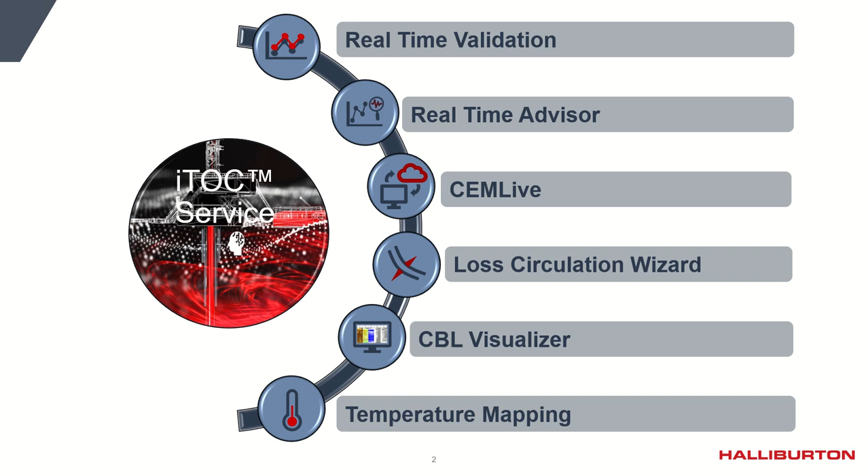Now let's dive into the first solution. The real-time validation is a solution that gives us the ability to assess execution deviations from the design or from the planning, all of this while execution is taking place. This will also enable us to monitor fluid positions while the job is taking place, and naturally, the end of job fluid position. You will have access to the main 4 variables.

In real-time pressure, real-time slurry rate, real-time density, and real-time slurry volume, in addition to having access to the calculated pumping pressure. The calculated pumping pressure is calculated by the model, geometry, fluid properties, and all the different placement parameters and pump schedules that are defined in the model by taking into consideration the actual real-time rate and real-time density.

When there's an optimum match between the calculated pressure and the real-time pressure, especially during the displacement phase, we can conclude that the hydraulic response of the model matches the hydraulic response of the wellbore. And as a result, the actual calculated ECD is representative of the downhole ECD that the wellbore is exposed to. We can also have a comparison between the design ECD and the calculated ECD.

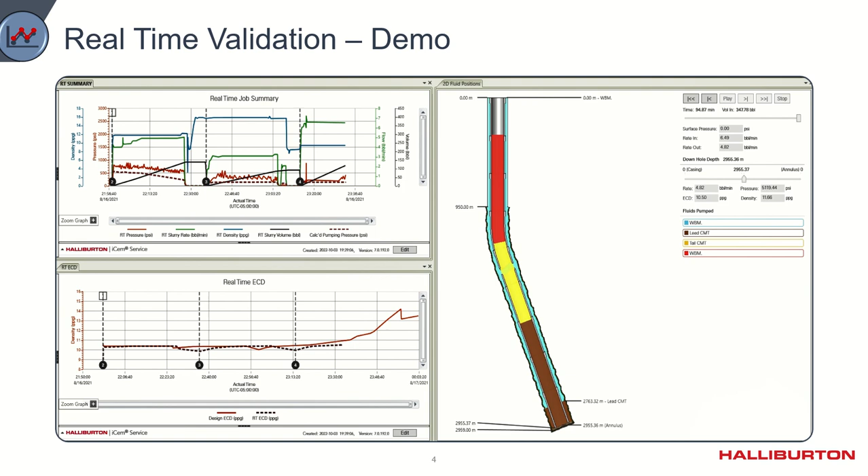We'll fast forward the displacement phase, which is one of the most critical phases in order to prevent any potential losses or any potential changes, or keeping the ECD within the pore pressure and the fracture gradient. What you can see here is that there's a good alignment towards the end of the displacement phase, or the last quarter of the displacement phase, in between the calculated and the real-time pressure.

This good match between the maximum pressure and the final circulating pressure, or the bump pressure, indicates that the hydraulic response of the model matches the hydraulic response of the well. And as a result, the ECD that is obtained for this case is in fact the downhole ECD that the well was subjected to.

This is information that you can use in real time in order to determine whether a zone is going to be fractured or not. Also, whether that ECD is maintained within the pore pressure and fracture gradient limits. And also importantly, is to determine which actual ECD the well was exposed to, so that you can use that information for adjacent wells or future wells.

But the important part of this tool, or this real-time validation, is, in addition, having access to that 2D fluid position. This is important in cases where there are some issues that take place in the middle of the job, but also important to give you an accurate representation of where the fluid positions are at the end of the job, meaning what are the tops of cement, especially when there's an optimal match in between the calculated pressure and the real-time pressure.

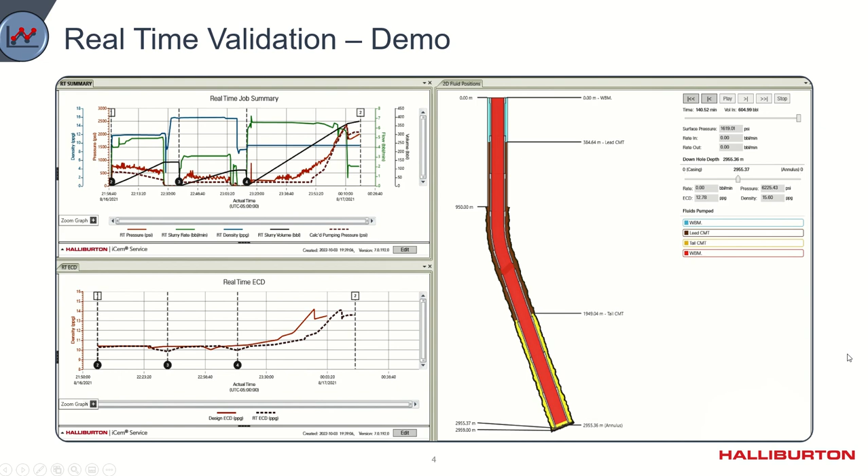So it's important to know that the real-time validation tool will give you the ability to monitor placement while the job is being executed. You're able to assess the 4 key variables: pressure, rate, density, and volume. In addition to that, if there's a good hydraulic response of the model compared to that of the well, then you will be able to also monitor ECDs in real time. And most importantly, you'll be able to have an idea of 2D fluid position during execution, and 2D fluid positions at the end of the job.

The real-time advisor tool pushes the boundary of real-time validation, the previous solution, mainly by giving you the ability to have a better understanding of whether the job objectives are to be met or not, all of this while you are executing the placement process. What does that mean? While you're executing the job, real-time validation focuses on from the beginning to the present point in time during the placement.

But the real-time advisor will forecast what that top of cement is. From any point while executing the job, it will give you the ability to understand whether that top of cement objective will be met or not by displaying a forecasted top of cement, a forecasted surface pressure, and a forecasted ECD. In addition, this solution will enable the cementing operator or the engineer on location to adjust multiple controls in order to tailor job placement with the end in mind of achieving operational success and ultimately achieving top of cement.

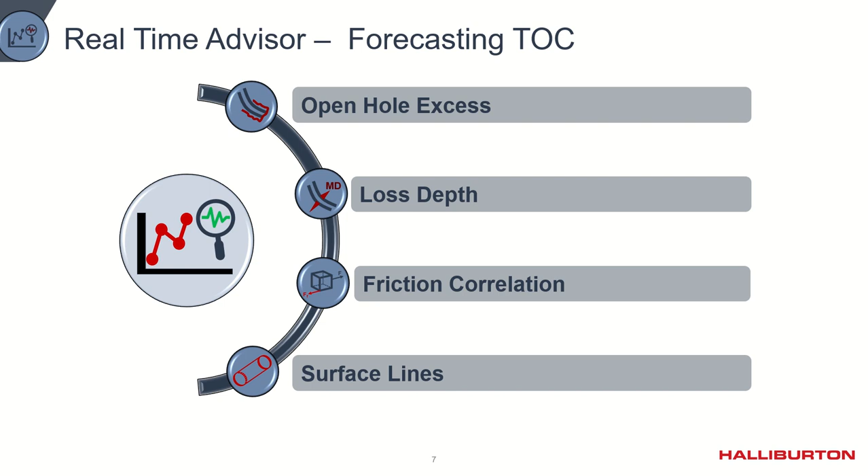As a result, the forecast will be able to give the operator and the engineer valuable information to make well-informed decisions while execution is taking place. You'll be able to adjust these controls in order to maximize the probability of achieving operational success and ultimately meeting those top of cement requirements.

Now let's take a look at a demo for this tool. So what we have here is the 4 controls that we mentioned earlier, which is open hole excess, loss depth, friction correlations, and surface lines. This is a preliminary proof of concept that we have for this tool. This is not the final user interface that you'll be exposed to, but it's representative of the capabilities of the tool. In the top graph, you have pressure versus volume, which could be pressure versus time.

These markers highlighted in red represent the plan or the design markers. What is the plan volume? At which point in time are we expected to pump each specific stage? And these dotted black lines represent the real-time markers. They initially match the design markers because we have not executed any stages yet.

Then in the bottom graph, you have the calculated or the forecasted ECD. Basically, what is the expected ECD that we're going to achieve should everything go as per plan. Then on the right side, we have the 2D fluid position. We have measured depth in the y-axis and diameter in the x-axis, with these black lines representing the actual casing size and the blue color representing mud, which is present in the wellbore prior to executing the cement job.

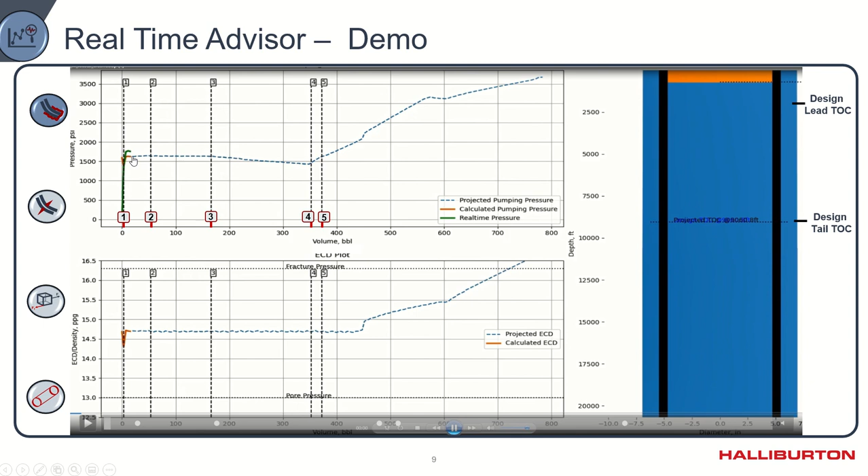Now let's walk back and let's make sure that we go through the demo. So the initial stage what we have is spacer. So we're pumping the spacer into the well. That's stage one. There's no major changes on plan compared to actual execution. So what you can see here is that you have a calculated pumping pressure, which is the orange yellowish line. You have a real-time pressure, which is the green line. There's no major discrepancies between the two. We have a good match.

We have used our control one, which is the open hole excess during the pre-job circulation phase, in order to generate a good match between the calculated and the real-time pressure. That means that the geometry is providing an optimum hydraulic response for the model, which is representative of the well. There's no major changes on rates and volumes. As a result, there's no changes on the actual stage tickers or markers in real time versus the stage tickers or markers for the design phase.

Then we finish pumping the spacer and we commence pumping the lead cement, which is stage 2. Again, there's no major changes, no major discrepancies. Something else to note here is that the projected top of cement is overlapping the design top of cement. The design top of cement is in the back in the blue color, also represented here by the marker.

There's no major discrepancies in regards to rates and volume while pumping the lead cement, and then we proceed to place the tail cement. Again, no major discrepancy towards the middle of the job. However, towards the end of the job, something we can point out here is that you see how the red marker for stage 4 is not in alignment with the dotted black line for stage 4.

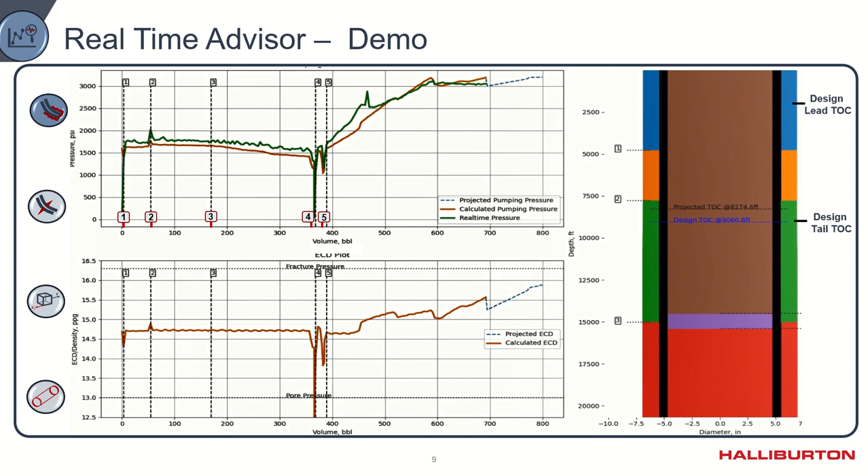Okay, and at the end of the job, we're able to actually establish that the final placement of the fluid is as indicated in the 2D fluid position graph. The projected top of cement is at a shallower depth compared to that of the design top of cement. The objectives were met. The ECD was kept between the pore pressure and the fracture gradient.

The forecasts enabled the operator or the engineer on location to make well-informed decisions. By reducing rates, they were able to minimize the impact of ECDs on potential losses.

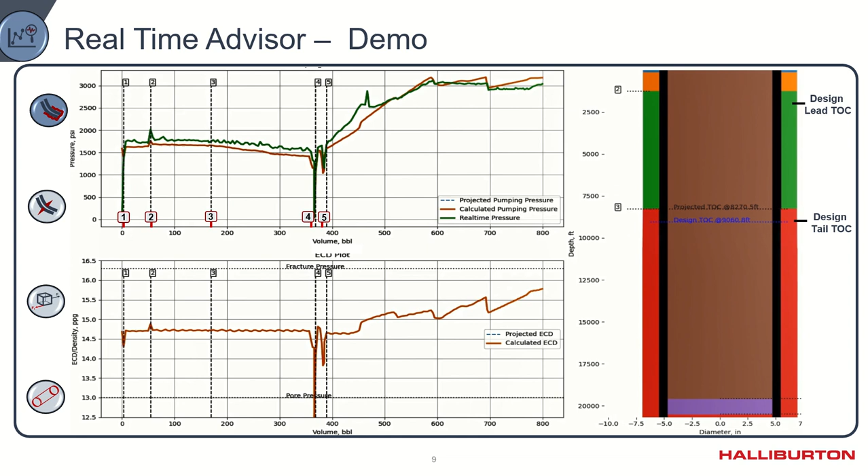So in regards to real-time advisor, this continues or pushes the limits and the boundaries of the real-time validation solution. While the real-time validation focuses on anywhere from the beginning of the job to that present time during execution, and how that hydraulic response is in alignment with the well response,

the real-time advisor looks beyond that point. It forecasts what is the expected response or output of the job, taking into account all the changes and variations that had taken place up to that point. And it will give the operator or the engineer on location the information in order to make decisions in real time in pro of achieving operational success, of achieving that top of cement goal.

That takes us to our third solution, CEMLive, which is an easy access cloud-based interface that enables remote monitoring by connecting remote engineers and supervisors to the rig site. And also importantly, it will allow you as our clients to have access to real-time jobs that are being executed, in addition to having access to some historical job results.

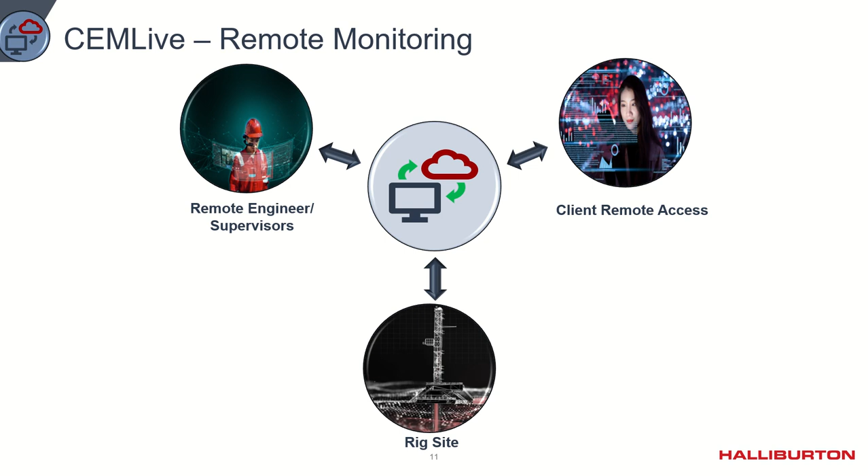In order to locate those active jobs, one of the views that we'll have on this tool is the map view. So when you'll have access to your area, to your project, to your rigs, and for those jobs that have been executed for your rigs and your area, you'll be able to monitor which ones have been executed and which ones are ongoing.

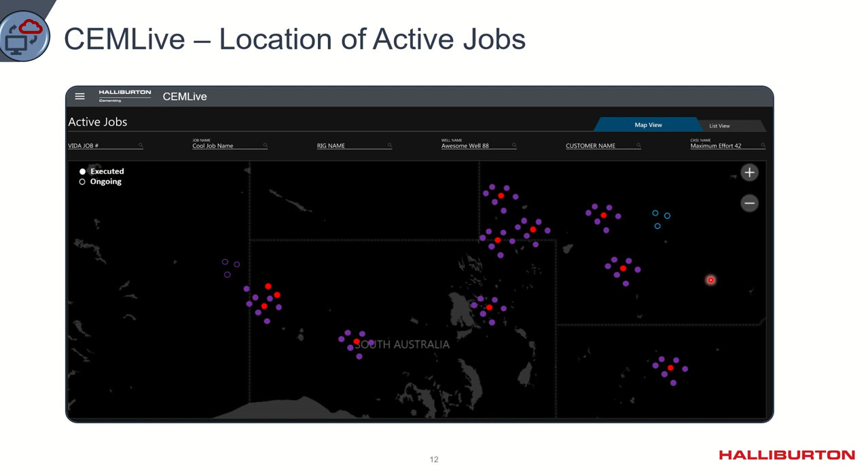By simply clicking on any of these jobs, each circle represents a specific latitude and longitudinal location of that specific job, of that specific well. Then you will be able to access in real time those that are ongoing, while they're taking place. In addition to that, you'll be able to actually access historical job results. You'll be able to download the real-time data for those that took place in the past, and you'll be able to monitor and observe any jobs that are taking place in real time.

You'll have a list view, which is the same information as the map view, just in a tabulated format, or have a specific VIDA ID, which is specific to each job. You have a job name, rig name, well name, which one is the operator, and what is the case that the job is being executed based on. This case name comes from iCem.

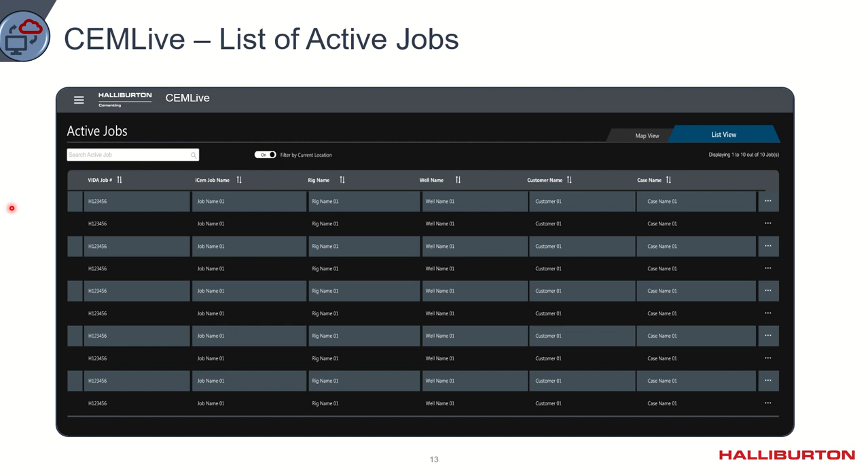In regards to the data structure that you'll be able to access, you have all the different data that the operator and the engineer will have access to in location, meaning pressure, fluid densities, rates, volumes. For offshore case, you'll have access to liquid additive rates, etc. In addition to that, you'll have access to calculated variables such as calculated surface pressure, calculated bottom hole ECDs.

For those fluid stages, you will be able to assess what is the density histogram of each specific fluid stage. That will give you an idea of if that density KPI is being met or not. This is while the job is being executed. You'll have access to an average density, a planned density, a min and max, and a standard deviation. And also importantly, you'll have access to what is the 2D fluid position while execution is taking place, and also what is the 2D fluid position at the end of the job.

The main goal of all these tools, as you can see so far, is giving you the ability to access the data in real time, have access to instantaneous top of cement, which is 2D fluid positions while the job is being executed, knowing where your fluids are at any given point in time, from the beginning of the job until the end of the job. And CEMLive is just the gate, the interface that will give you access to all of that information. You don't have to wait until the end of the job and then a post-job report evaluation is generated. You're going to have access to this information while execution is taking place.

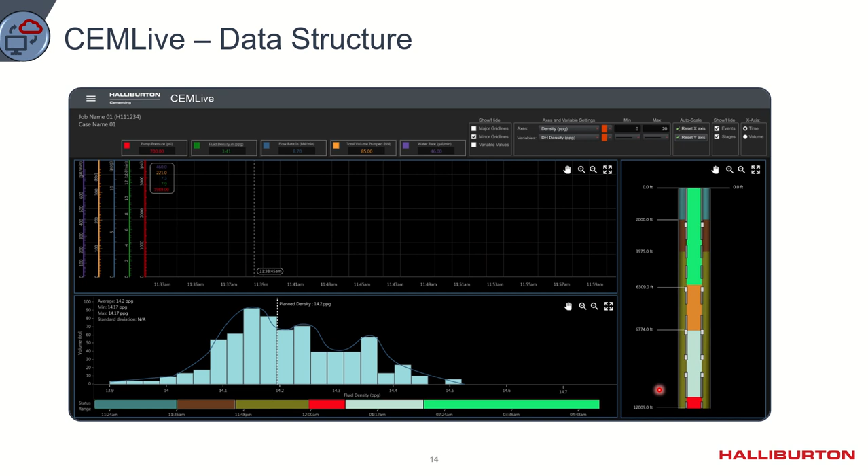Now, just to give you an idea of what the tool initially looks like, this is just a representation of the data transferring part. In this case, we'll transfer pumping pressure, slurry rate, slurry density to the tool. And as you can see, you'll have access to all the different stages and events that the operator defines while executing at the rig site. Same names that the operator defines, so you know what is being done at any given point in time in terms of which fluid is being pumped, etc.

And in addition to that, you'll have the ability to download a CSV file while the job is taking place, or you can wait until completion of the job in order to access it or to download it. Keep in mind, you'll have access to the historical jobs that have been already performed. So even though you were not able to monitor any of these jobs, you will be able to go back to CEMLive, click on that job that you want to see the real-time data from, and you'll be able to download it at any given point in time.

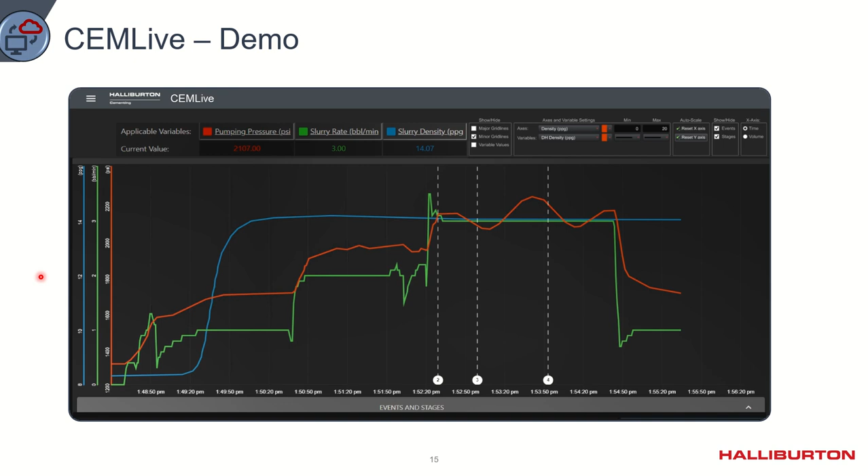So the advantage of CEMLive is giving you easy access to real-time data so that you can have instantaneous job validation, so that you can have, after execution takes place, the ability to print or attain a top of cement validation report, so that you can use that information to meet your internal requirements and in some cases potentially regulatory requirements.

Our next solution is Lost Circulation Wizard. Lost Circulation Wizard optimizes our top of cement prediction by improving our lost circulation model. The Lost Circulation Wizard consists of two stages. Number one is the model calibration.

The model calibration stage consists of employing the geometry, fluid properties, placement parameters, and other factors from the iCem design file, and combining that with our understanding of what is the loss type, whether that is an induced fracture, a natural fracture, or a permeable formation. What is the loss rate that is typically attained in that specific well or in that specific field? What is the expected loss depth, or what is the formation that usually results in losses? What is the area that usually results in losses?

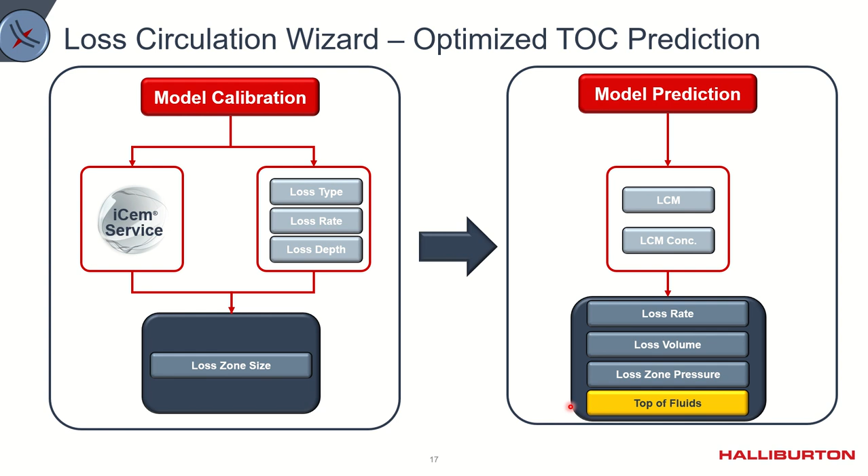Now, how do we assess the accuracy of this model? We have looked at different locations, different basins, different loss types, including all the ones that we can model, which are natural and induced fractures along with permeable formations. Importantly, we assessed a wide range of loss rates, from 30 to 240 barrels per hour. We also evaluated different fluid LCM packages in cases where the LCM was added not just to the spacer but also to the cement, and at different concentrations.

So what we're looking at here is Tuned Defense cement spacers with BridgeMaker II, and more conventional LCMs such as Kol-Seal and Pol-E-Flake at different concentrations. Other cases where we added LCM, in this case BridgeMaker II, to the Tuned Defense cement spacer, but also to the lead and the tail at different concentrations. And other cases where we employed more conventional spacer designs with LCMs, also adding those LCMs to the cement. Ultimately, what we measured in the actual jobs was the percent reduction in losses after the treatment, and then the prediction of the model.

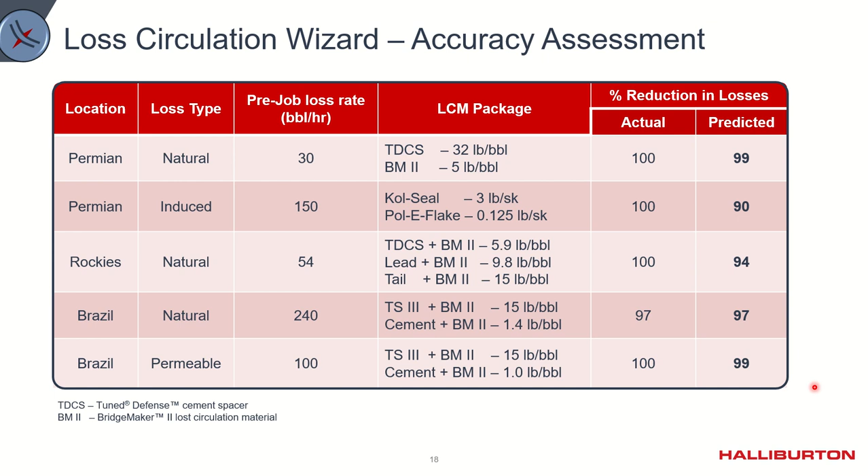What you can observe here is that the prediction of the model based on the actual tests is at least 90% accurate. When we compare this to other models based on literature reviews, typically the other models are numerical, based on some statistical analysis. Their accuracy is in the order of 66-67%, while our model is physics-based and has an accuracy of at least 90%, which is extremely good.

But in addition to assessing the accuracy based on actual well results, case studies and data, we also challenged the model: if our loss prediction is accurate, the hydraulic response of the model when exposed to losses should match the hydraulic response of the wells where losses took place. And that's precisely what we check.

So what we're looking at here is surface pressure. You have in the yellow-orange line the real-time pressure, the hydraulic response of the well, versus the calculated pumping pressure, the hydraulic response of the model, by modeling losses and those specific fluid and LCM concentrations and packages, geometries and distribution.

Those tailored fluid solutions, we model those, which is what actually was executed during the jobs. And we assess what is the response of the model. If the model is accurate from the prediction, it should be also accurate by matching these hydraulic responses. And that's what we were able to achieve here. So you can see there's no major discrepancies between the real-time pressure and the calculated pressure.

In addition to that, we're able to assess what is the rate in, the rate out while executing these jobs. And by doing so, we're able to determine at which point during the placement process we actually cure the losses or mitigate the losses, depending on the case.

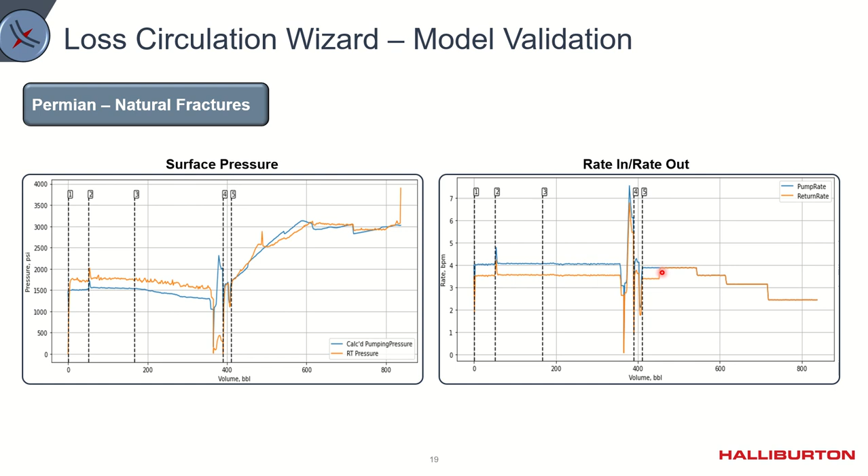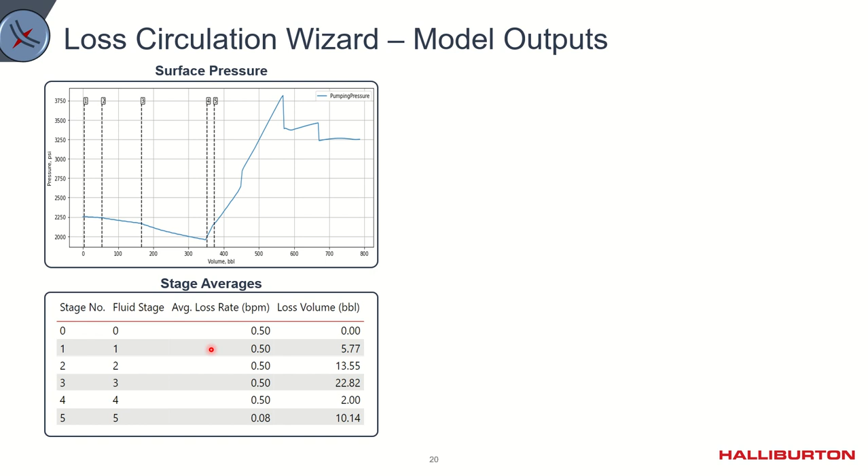In terms of the outputs that we're able to achieve, naturally we have surface pressure. We're also able to determine what is the loss rate and the loss volume per stage, where each stage represents a fluid. You have stage 0, which is mud, then spacer, lead, tail, then water behind, and displacement fluid behind water. You're able to assess what is the average loss rate over each stage and how much volume has been lost or will be lost for each fluid.

In addition to that, we have these black markers which represent stages, represent fluids that are pumped into the well, and we have these red markers which represent events. These events in the context of Loss Circulation Wizard are representative of when each fluid reaches the loss zone. Event 1 means that the spacer reached the loss zone, etc.

By having the event average table, we're able to assess that when the spacer, which is fluid 1 or stage 1, reaches the loss zone, the loss rate significantly reduces and the loss volume also significantly reduces. That means that the spacer, since in this case it is the first fluid with an LCM package in it, is able to mitigate the losses significantly.

That is attained by monitoring the loss rate. You can see the loss rate significantly reduced when fluid 1 reaches the loss zone. And in addition to that, we're able to monitor how much loss rate we have and how much loss volumes we have from that point on.

All this information allows us to assess how effective or how efficient these fluids and LCM packages are in the goal of mitigating losses. In addition to that, we'll get valuable information as to how much volume of each fluid we are potentially losing or potentially saving as a result of the fluid LCM tailored solution.

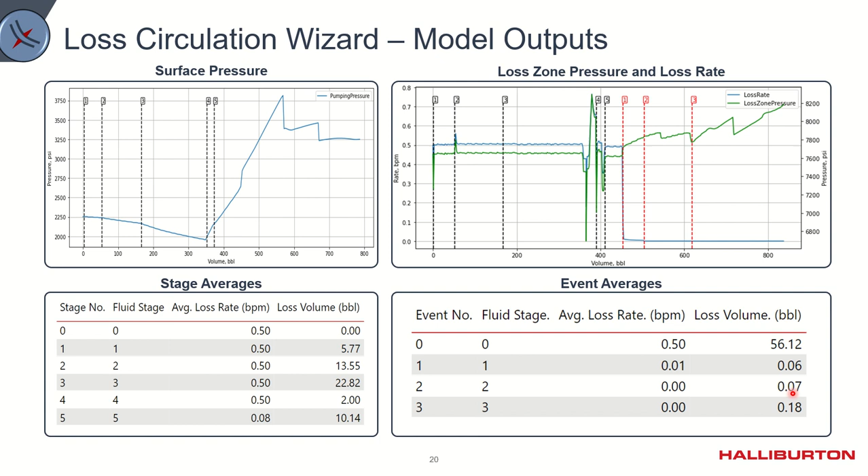The initial tool will be a standalone tool, which is Loss Circulation Wizard 1.0, where we're going to have the stage average results we already discussed, where each stage represents an individual fluid that is placed into the wellbore. We have the event average, which represents when each stage or each fluid reaches the loss zone and what are the actual loss rates and loss volume from that point on.

In terms of actual graphical results, we're going to have real-time versus calculated pumping pressures. And we're also going to have loss zone pressures and loss rates, in addition to loss zone ECDs and the limits of pore pressures and fracture gradients.

We will also have a 2D fluid position, which is going to be responsive to the losses and the loss dynamics, and ultimately will give us a more accurate representation of what the 2D fluid position or top of cement output will be when losses are attained, or when losses are mitigated as a result of using a tailored fluid and LCM package.

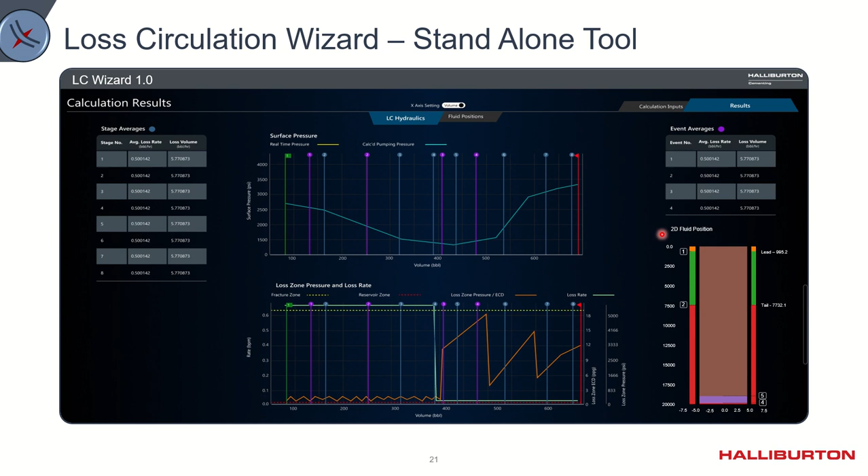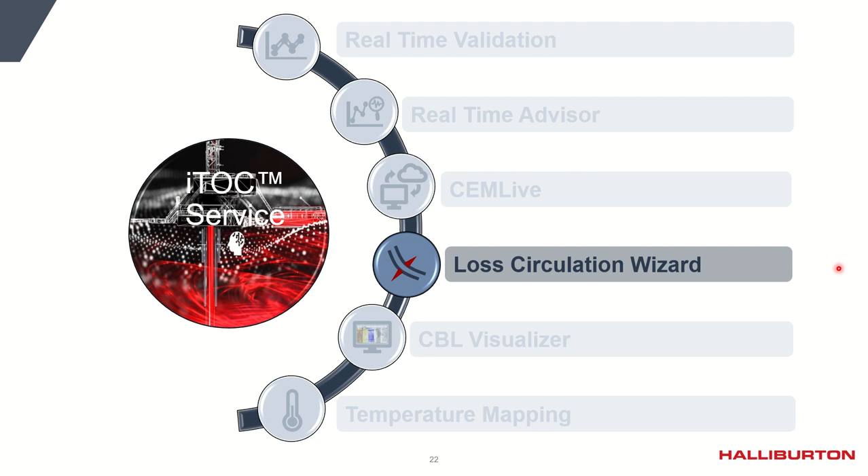So Loss Circulation Wizard enables us to improve our top of cement prediction in cases where losses are attained by giving us the ability to model multiple loss types and add our improved understanding of our loss model. And with that, we'll move to our next solution, which is CBL Visualizer. How do we optimize our top of cement predictions?

What we do here is we're able to position side by side our iCem 3D displacement prediction for top of cement or fluid placement with an actual CBL. We'll be able to import a DLIS file into iCem and have that side by side comparison. In the first place, that side by side comparison will improve the reliability and the accuracy of our model. And with it, you will be able to use that information in some cases to meet regulatory requirements.

In addition to that, it will help us continue to push the boundaries and the limitations of the model as we get more cases, and those side-by-side comparisons will be able to continue to increase the reliability and the accuracy of the prediction.

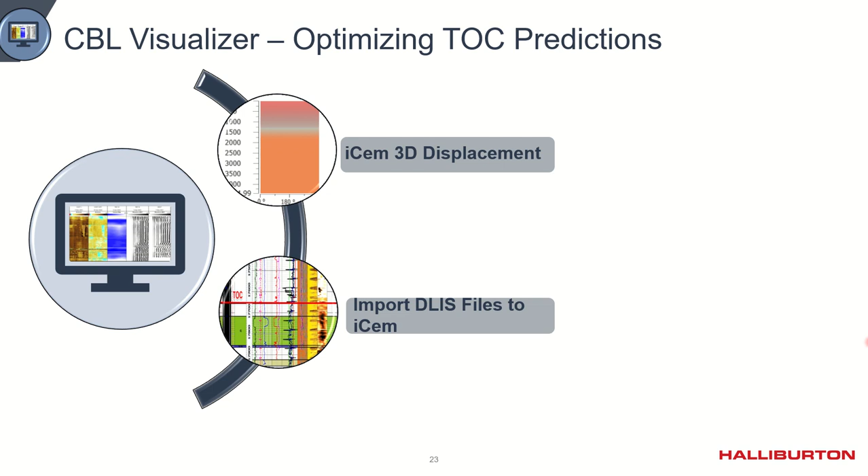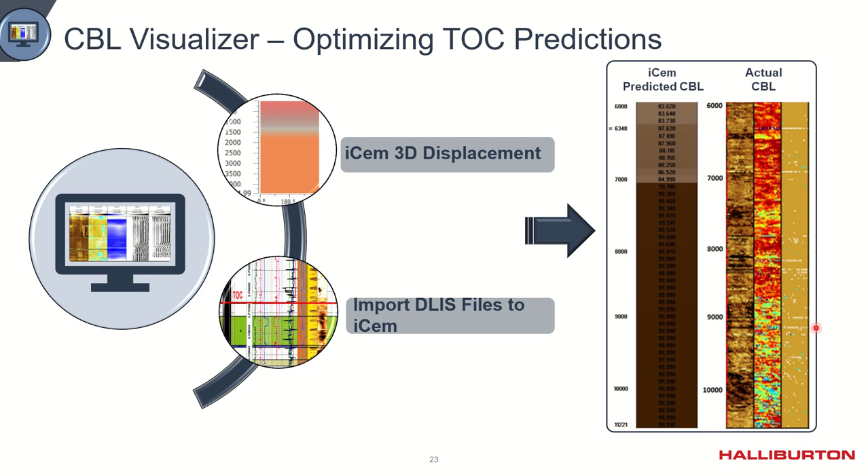The main advantage of this prediction is that we'll be able to generate an iCem predicted CBL based on Displace 3D simulations. We'll be able to position that side by side with the actual CBL determined based on that imported DLIS file. Ultimately, we'll continue to have our existing 3D displacement responses or graph.

We'll be able to generate an iCem predicted CBL based on the 3D displacement predictions or simulation results. We'll be able to generate that CBL predictive map, which will be responsive to the different displacement efficiencies. As you can see, the percentages are representative of those. It will be the main factor influencing those CBL predictive maps.

And then you have that DLIS import, which will generate an actual CBL. And having that side-by-side comparison will continue to strengthen the reliability and the accuracy of the model. It will challenge the model naturally in some cases, will push the limits and the boundaries of the model so that we continue to improve its accuracy and reliability.

You'll continue to have access to these Displace 3D results, but with the added value of giving you the opportunity to have a side-by-side comparison of the predicted CBL response that iCem Displace 3D provides versus the actual CBL, so that you can use that information to meet, in some cases, regulatory requirements.

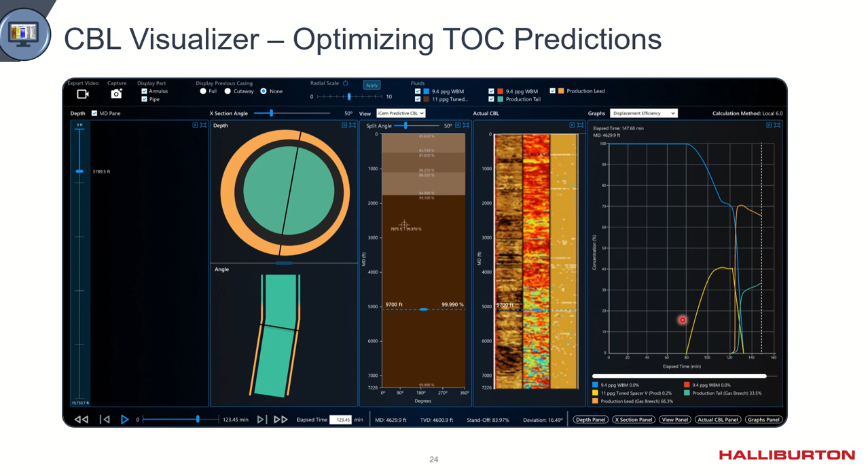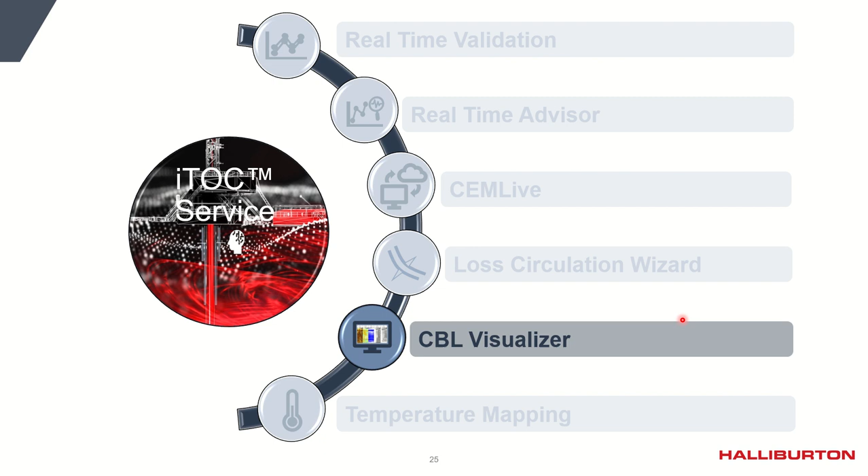That's precisely what this CBL Visualizer will enable you to do: achieve the ability to meet this regulatory requirement by having a side-by-side comparison between the prediction of the model versus the actual CBL, which ultimately will strengthen the accuracy and reliability of the model to the point that you'll be able to use the prediction in many cases to meet any type of regulatory body needs or requirements.

That takes us to the last solution, which is the temperature mapping. Our ability to take advantage of wells where optical fiber is deployed. By having those optical fibers deployed prior to cementing operations, we will be able to monitor not only cement placement, but also cement properties or hydration while waiting on cement. Currently, in all these wells, we have an interrogator at surface that's able to collect the data while waiting on cement or during placement of the cement job.

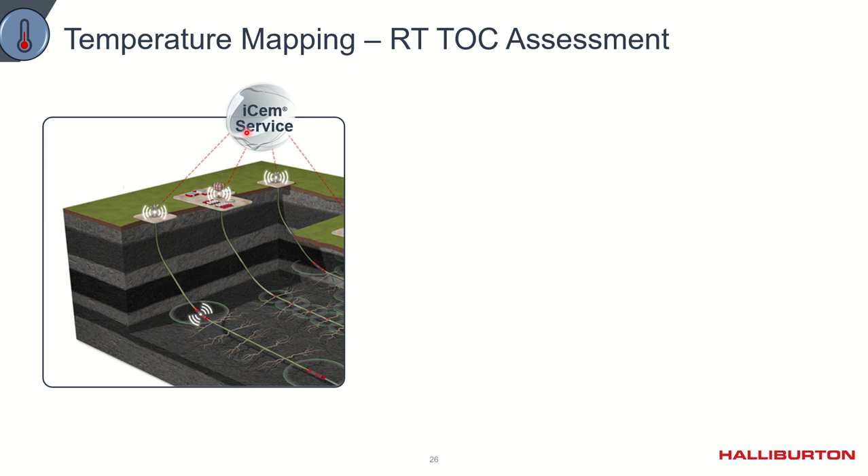The end goal of this tool is to be able to tie that information with iCem, to overlap that temperature map generated by the optical fibers with the iCem calculator and predictions. That's precisely what we have here.

By monitoring that inflection point and overlapping that with our cement Displace 3D prediction, we're able to assess and map where the top of cement is, and potentially provide you with this information so that you can use it as a confirmation of top of cement and fluid placement.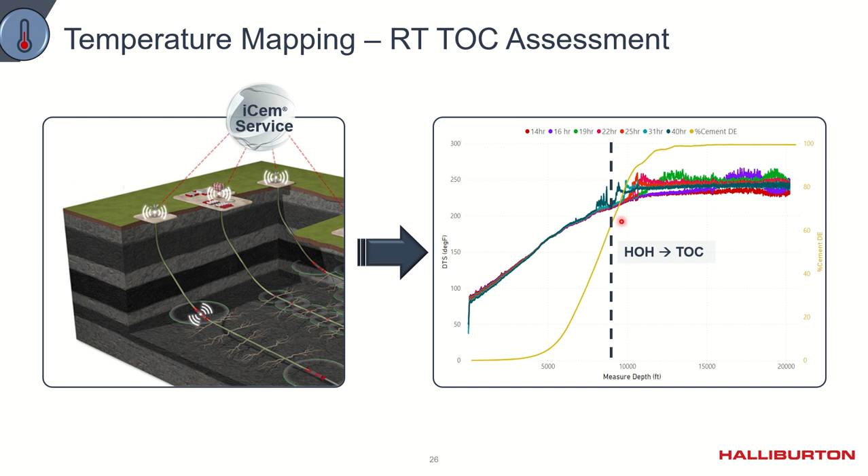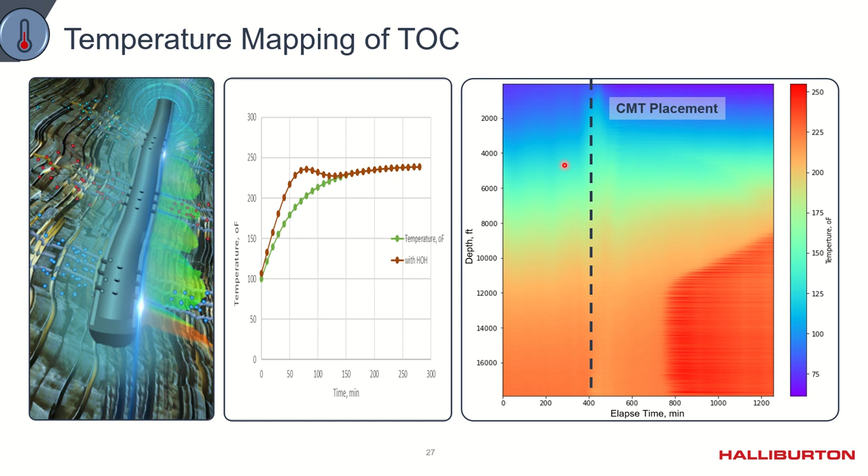There's several pieces of information that we can get from this map. Number one is when the cement placement took place, which is when you see that variation in color, a variation in temperature. That change in temperature is representative of something taking place in the well. In this case, this is when the cement job is executed. Number two, very apparent and very obvious, is this sudden change in color, a sudden change in temperature that starts taking place roughly around 780 minutes. What that represents is heat of hydration, when hydration starts taking place.

In this specific case, what you note as well is that the range of the well where hydration is taking place increases over time. That happens because the cement at the shallower positions is at a lower temperature, and as a result, hydration for those cements will take longer. What this gives you is the ability to predict fluid position while waiting on cement. It will give you the ability to make well-informed decisions as to when to resume drilling, when to continue with operations, having an understanding of where the fluids are and where the top of the cement is.

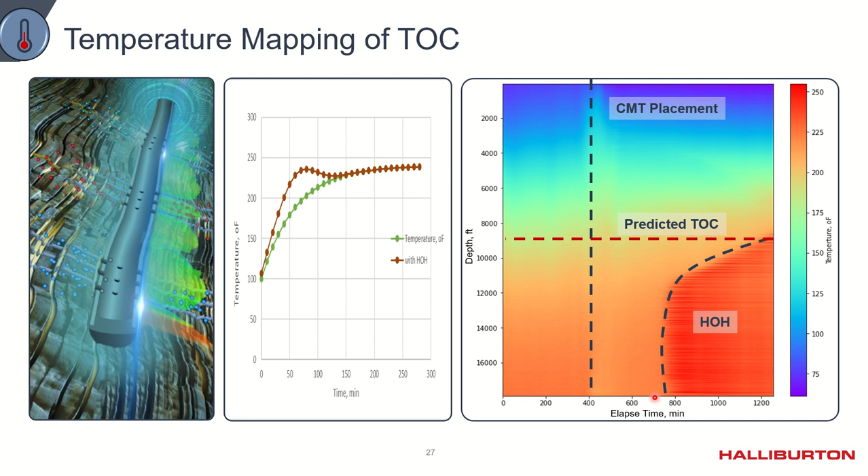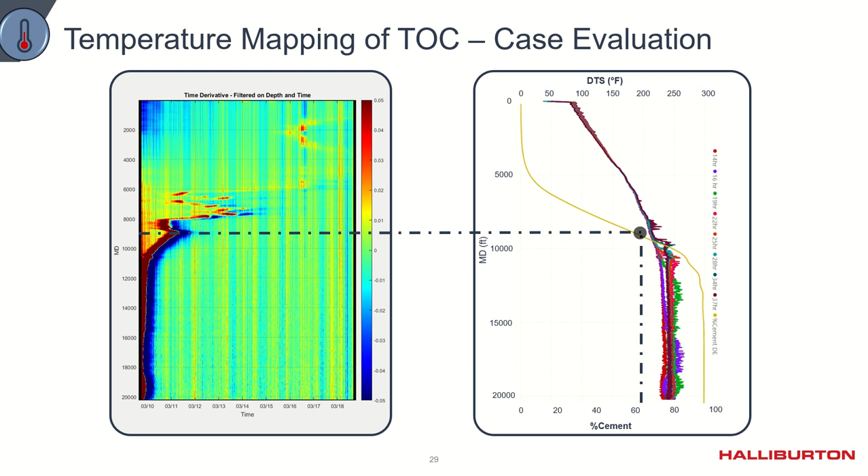Ultimately, what we're able to achieve with temperature mapping is give you a very powerful tool that will couple iCem predictions with actual temperature measurements, taking advantage of our understanding of hydration to assess fluid placement and ultimately top of cement so that you can meet the regulatory requirements. It is potentially minimizing the need or replacing CBL requirements, since you're able to get an actual measurement and you're able to couple that with our displacement 3D prediction and our CBL prediction. And by having the prediction and the actual measurement in complete alignment, you'll be able to support that information and to provide that measurement as a fluid placement requirement, or the ability to meet the fluid placement requirement.

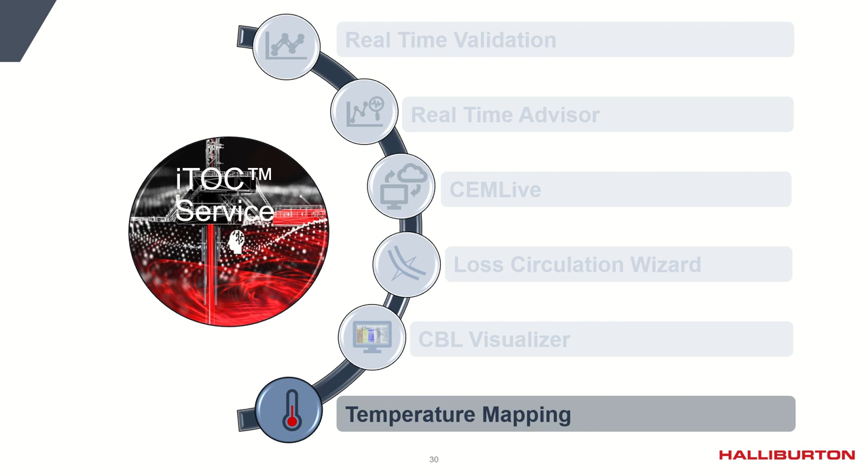So today I have introduced you to iTOC, a remarkable initiative that encompasses 6 great solutions. Real-time validation, which gives you the ability to monitor job placement and expected downhole ECDs while execution is taking place. Real-time advisor, which provides you with the capability to forecast job placement while the job is being executed, and most importantly, it can give you the opportunity to adjust placement parameters in an attempt to meet job requirements in order to achieve top of cement. CEMLive represents a cloud interface that will enable you to access real-time job execution and historical job results.

Loss circulation wizard, which merges our optimized understanding of the impact of multiple loss types in induced and natural fractures along with permeable formations, and what is the impact of those losses on the hydraulic response of the wellbore, and ultimately what is the impact of losses on top of cement. The CBL visualizer will enable you to compare side by side the accuracy of our 3D displacement model in relationship to the actual CBL, and it will also serve as an opportunity for us to continue to challenge the boundaries of our predictions. And most importantly, it will serve you as a top of cement confirmation for regulatory purposes.

And lastly, the temperature mapping, which allows for monitoring of cement hydration while waiting on cement, thus enabling fluid placement and top of cement assessment. This gives you the ability to measure fluid placement and measure top of cement potentially even prior to achieving wait on cement time recommendations. As a result, you can yield savings to your operations and an ability to provide measured fluid tops to meet regulatory requirements without the need in some cases of CBL, since you have an actual measurement of fluid placement.

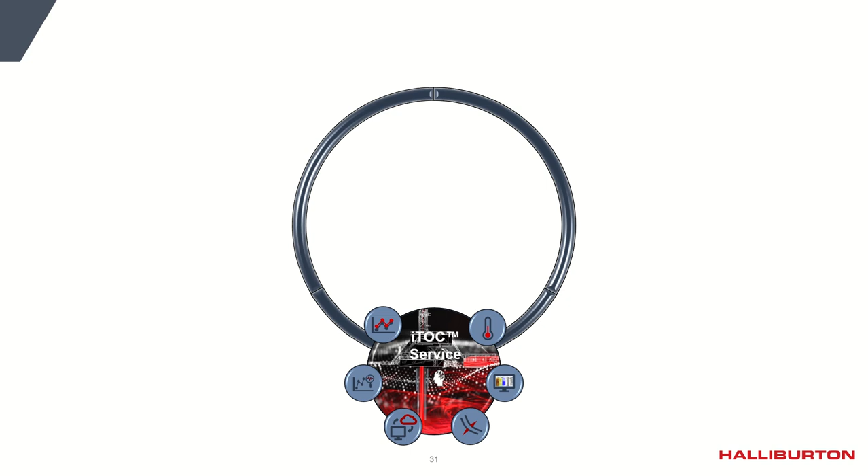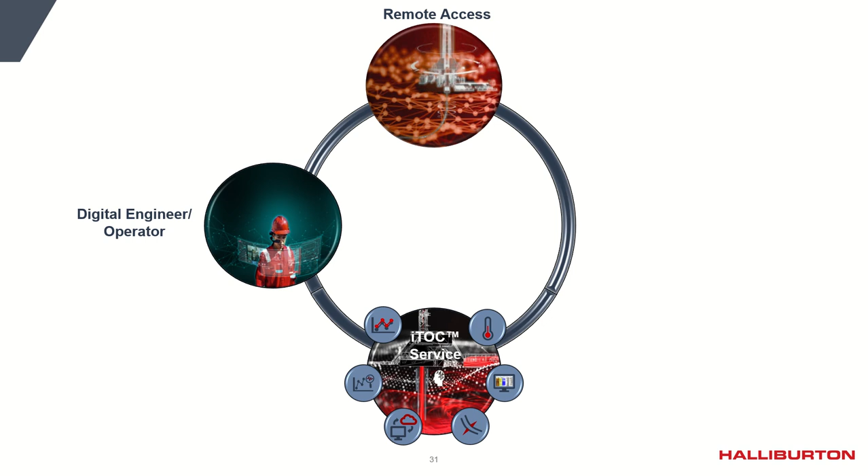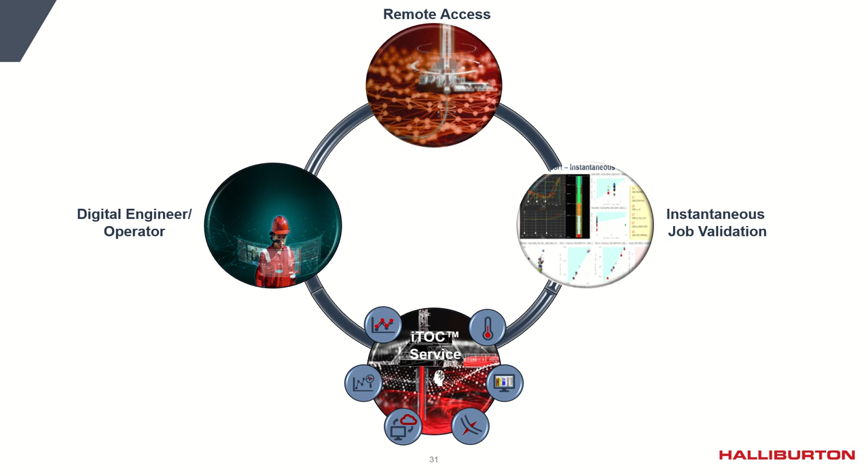In essence, iTOC will enable a digital engineer and a digital operator to remotely access a rig location, which can now enable a specific SME access to any required operations, regardless of the SME's location. All of these will enable the end goal that we all want to achieve, which is instantaneous job validation. An ultimate objective in instantaneous job validation that is not possible without your collaboration as our clients and our ability to continue to listen and respond to your needs.

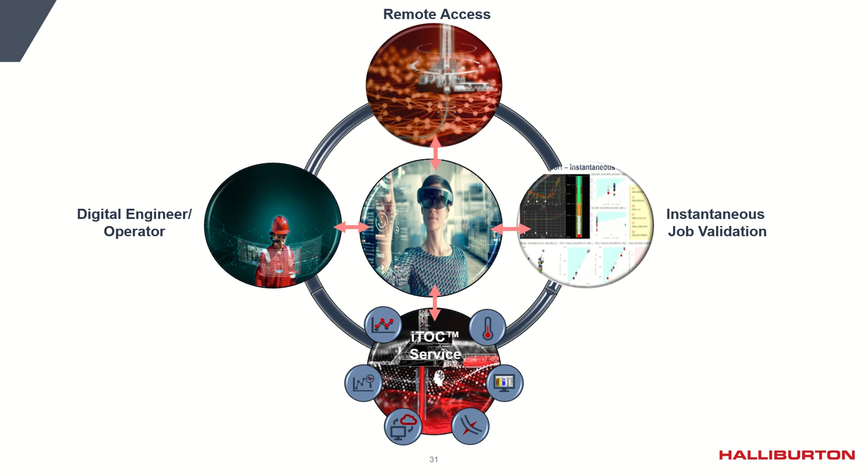None of this, and let me be clear, none of this will be possible without your collaboration, without the help and your communications in giving us the opportunity to continue to work and collaborate with you in order to engineer different solutions. And as a result, we would like to encourage you to please participate in this Voice of Customers and continue to provide your feedback so that we can collaborate and engineer solutions to maximize the value of your assets.